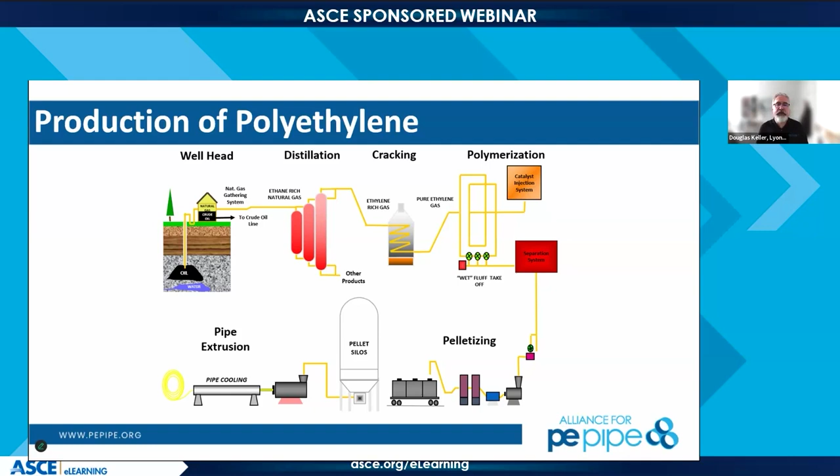We load those materials into a rail car. The majority of polyethylene is shipped to our customers in rail cars. Rail transport is an extremely efficient way to move polymer around the country. When it gets to our customer, they unload, check the material, and make sure that what they received is what we should be sending them, load it into their pellet silos, and then they go through the pipe extrusion step. Now, Alan, if you can go to the next slide.

This is kind of an old schematic of a polyethylene pipe production line, but way on the left, in the upper left corner, you see the extruder. It's somewhat hidden. In that extruder, we have a single screw that is turning. It is using frictional heat to take those pellets, melt them, and form them into a stream of material coming out of the die. That then goes into the vacuum tank where it is sized.

Most polyethylene is sized to the outer diameter of the pipe. So we have a certain fixed outer diameter that we're looking at. And then we can adjust by changing the die setup, how thick the pipe is and what the diameter of the pipe is. It then goes into secondary cooling tanks.

So we're trying to take that heat back out to solidify the material. It is being pulled by the pulling head or the pulling machine once it comes out of the die. We go through wall monitoring to make sure that we're making the diameter and the thickness that we need. And then the pipe is cut in whatever lengths that you need. So we can supply pipe in stick form, which is typically 6-inch diameter and above, or we can also provide it in coil form, which is 6-inch and below, depending on what your application is and what your end use for the material is.

So, Doug, this gets bigger, right? When we get into larger pipe, because we've been talking about larger pipe for a while. I mean, this stuff gets pretty darn big, doesn't it? Yes, it does. So these lines can be 150 to 200 feet long, to give you an idea of how long they are.

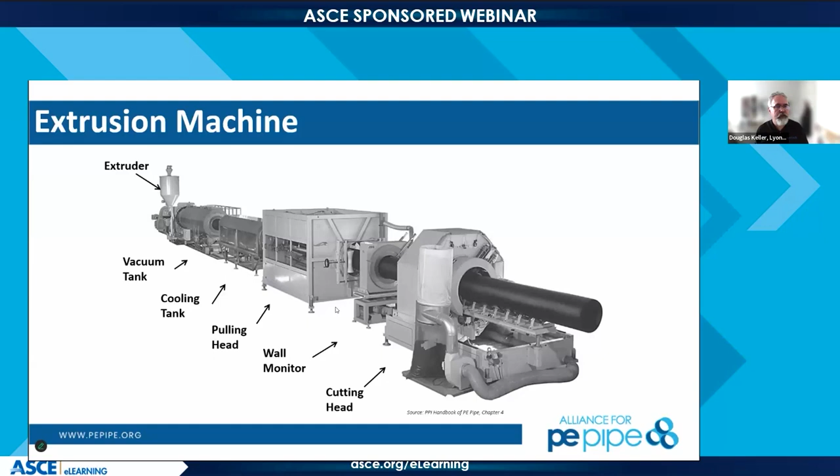All right, next slide. So when we talk about plastics, there are two general categories. Think of this like metals - you have your ferrous metals, your copper metals, your aluminum metals.

In plastics, we have thermoplastic materials, like polyethylene or polypropylene, as you can see from the pipes in the image. A thermoplastic material can be repeatedly softened by heating and then hardened by cooling. This allows us to take those cold pellets, heat them up, make pipe, and send the pipe to you. We then fuse the pipe together by heating it up again, cooling that joint down, and now you have a monolithic piping system.

So it is reversible and repeatable. The polymer maintains all of its physical properties during this melting and cooling phase. There's really no change to the polymer in the number of times you'd typically expect heating and cooling to occur. Typical thermoplastics include polyethylene, PVC, polypropylene, and the polyamides, which includes nylon.

On the other side, we have what's called thermosets. This is a material that, when heated up, undergoes a chemical reaction called the curing process, which turns it from a material that can be heated and reformed to one that can't. So it changes the mechanical and material properties of the polymer - it's irreversible by application of heat.

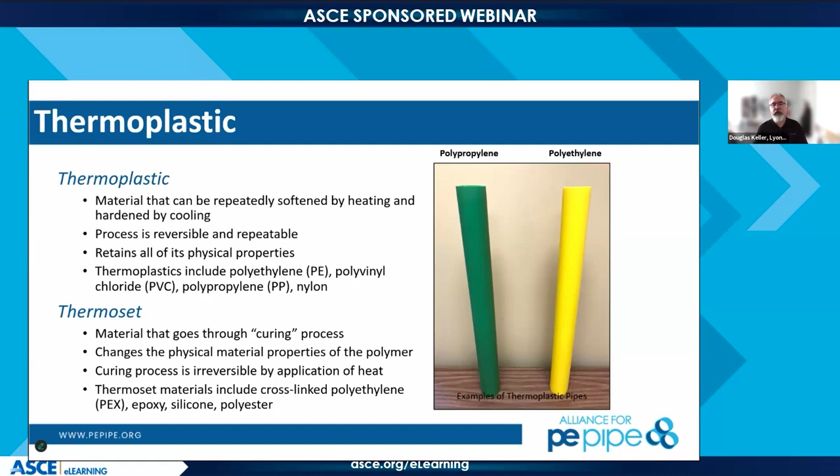In the piping world, this would be something like an epoxy fiberglass reinforced pipe - I'm not going to name the name, but you know who I'm talking about. Those are typically stick pipe with some type of mechanical gasketed joint, because you cannot heat them up and fuse them back together. On the plumbing side, PEX, or cross-linked polyethylene, would be another example of a thermoset material.

Next slide. When we talk about material and fusion, I want to point you to this example on screen. This is multiple thin sheets of polyethylene that have been laminated together and then put through the butt fusion process. So when we talk about material flowing into the joint, you can really see what's happening to the material when it's heated and when pressure is applied to that fusion joint. That material is spreading, and as it spreads, it allows that joint to be formed.

Next slide. This is a video of the fusion process. Here we've heated the material up, we've created a bead. We're removing the heater plate, and now we're bringing the pipe ends back together - you're going to see the fusion bead form. See how that material is flowing up and out, and on the inside it's flowing out and down to form the fusion bead.

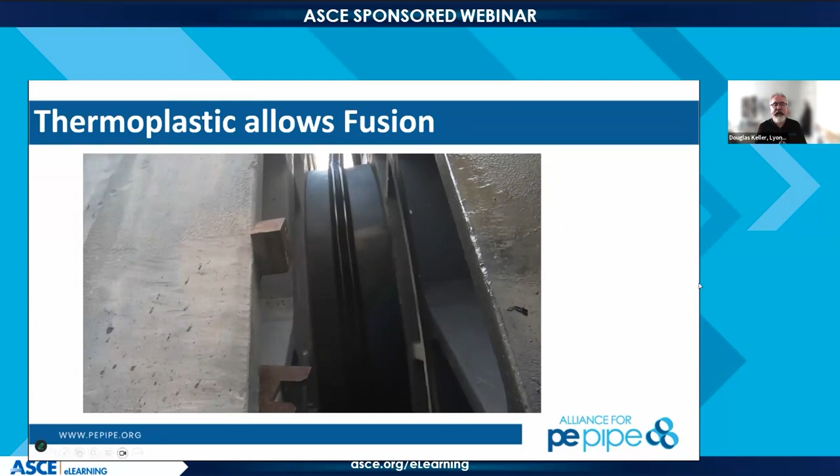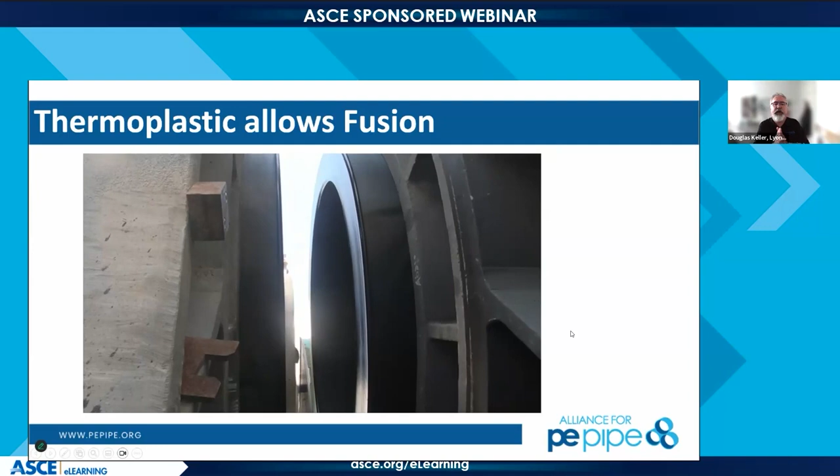So this is what can be done with a thermoplastic material that can't be done with a thermoset material. Now, I don't recommend quickly removing the bead like they did in this video - there's a cooling step and things we have to go through - but it's that thermoplastic property that allows fusion to occur.

So what happens during the heat fusion step? Well, polyethylene is a semi-crystalline material. For high density polyethylene, it's roughly 60% crystallinity, and the crystal section is a regularly ordered crystal structure, very similar to metallics that have a crystal structure to them. In between those crystals, which are tightly packed loops, we have amorphous material.

So what the amorphous phase does is it ties those crystals together, and it has a certain give to it that allows for some of the properties we'll talk about. So when we heat up the material, as we heat it in that fusion zone, the crystal structure is erased and the material becomes very amorphous. There's no general structure to the material.

When we bring those surfaces together and allow it to cool, we have material flowing in the joint. As it flows, those chains basically start to entangle with each other. And as it cools down, we reform that semi-crystalline structure. You can see in the last picture, now we have a semi-crystalline structure that resembles the two single pieces of pipe, but that semi-crystalline structure is across the whole joint.

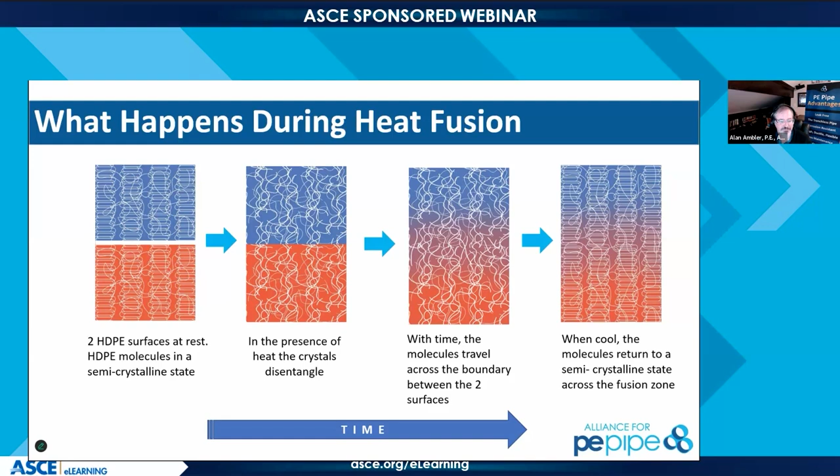I'm sorry to interject. Okay, next slide, please.

All right, so I talked about semicrystalline before. Again, the crystalline regions give the material its density. And density is related to the tensile strength of the material. The more dense the material, the higher the tensile strength, the higher the stiffness, the more chemical resistance you have. If you're a chemical and you want to get through that image on the left, that's a pretty tortuous path.

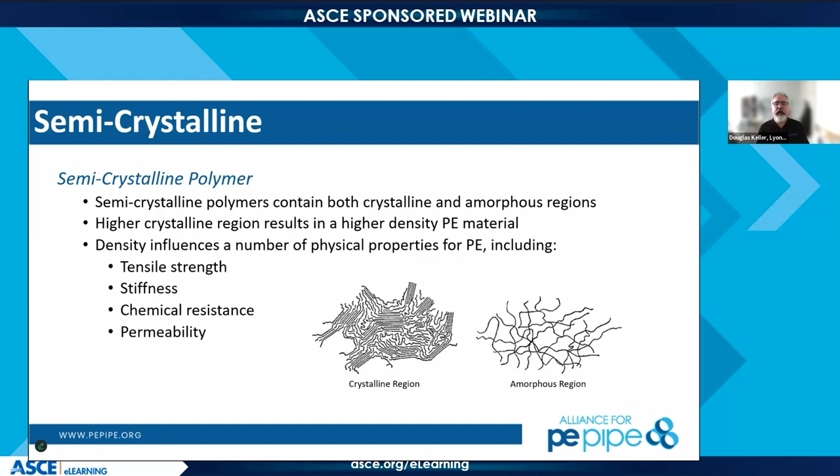That's like driving through New York City. However, on the right, if you're a chemical and it's all amorphous, it's pretty easy to get through. That's like driving through West Texas. So the balance of these two properties is what gives polyethylene a lot of its properties and its advantages over some of the competitive materials like metallics, PVC, and other plastic materials.

So again, think of it as being semi-crystalline and think of it as a benefit. When we have a semi-crystalline material like polyethylene, we have what's called viscoelastic behavior. Depending on the force applied and how long it's applied, the material will respond differently.

So if you take a sledgehammer to a polyethylene pipe, give it a big whack, the sledgehammer is going to bounce back. Hopefully you're not directly in front of it. If, however, we are applying stress over a longer period of time, say in a 10-hour range, where we're doing a horizontal directional drill and pulling on that pipe under tension, its modulus of elasticity, its stiffness, will decrease over time. So it depends on the duration of the load.

Now, I know you're looking at this going, yeah, but I want to design for a 50-year, 100-year service life, Doug, I want 150 years of service life. Does that mean my stiffness has basically gone down to 20% of what it was when that pipe was sitting on the ground waiting to be installed? No. When properly buried, the amount of force from the crown and the arching effect of the soil is about 1 to 2 psi. So if properly installed, this pipe is really seeing no type of backload, even if we're talking about 25, 30 feet of depth of cover.

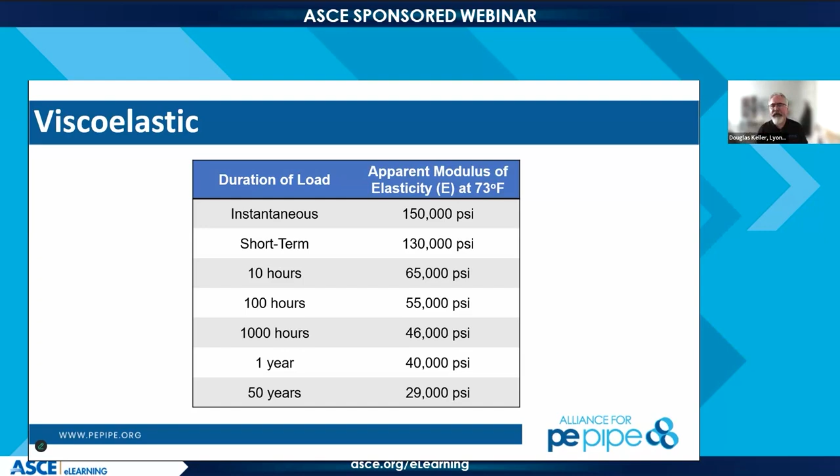Yeah, and the other thing is we'll talk about surge allowance in a little bit, but the benefit of polyethylene is that elasticity that it has. So when we have a surge event come down the pipeline, it's basically going to cause that pipe to expand. The pipe, because of its elastic properties, will stretch a bit like a rubber band and absorb some of that energy from a surge event. So that's why we have significantly better surge resistance than other materials, because of that elasticity inherent in the polyethylene molecule. Next slide, Alan.

So a little bit more on viscoelasticity. We use silly putty as an example. Silly putty is a polymer, a very low molecular weight polymer. If you take a ball of silly putty and sit it on the counter and let it sit, after about 5 minutes it goes from being a ball to being kind of a lump or a patty. And that's creep. So all plastic materials will creep over time.

Now, from a design standpoint, it's not something you need to be concerned about, because again, a properly installed pipe, whether above ground or in ground, is going to be supported so that creep doesn't become an issue. But it is that elasticity, that viscous flow over time that occurs.

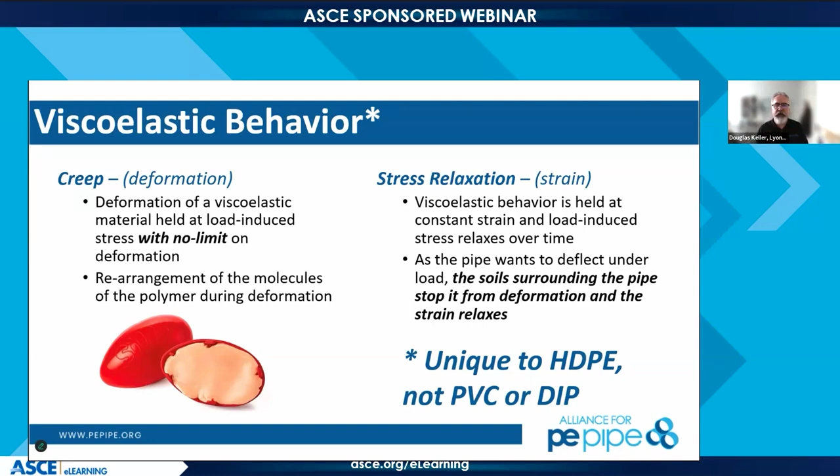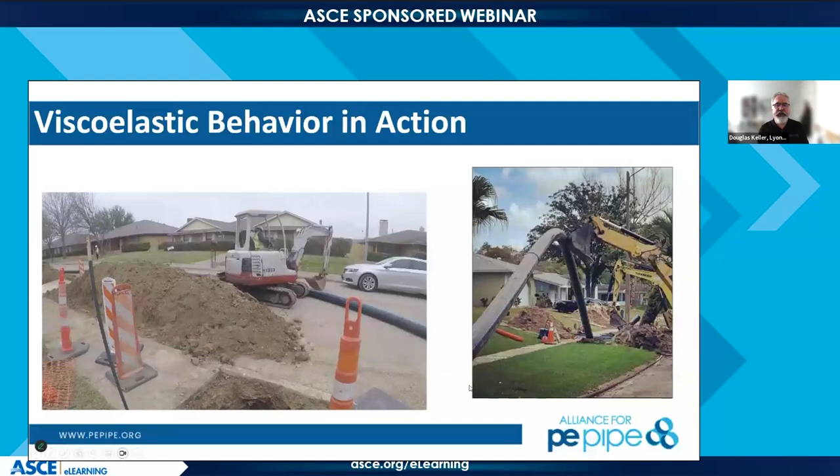The video on the right basically shows that viscoelastic behavior, the ability of the polymer to take short-term loads by being lifted up and then pulled down as part of the entry pit for a horizontal directional drill. So that's the benefit of the material. This is not something you could do with any type of metallic system. You could not do this with a PVC bell and spigot system. So that's that unique benefit of polyethylene in the real world installation.

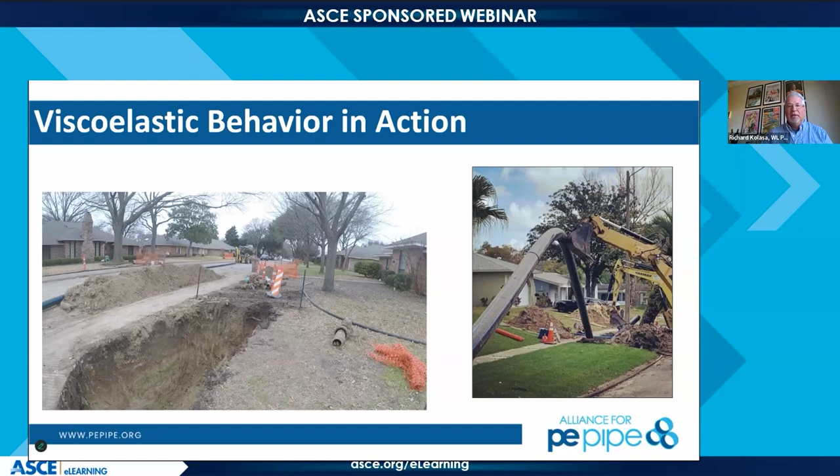When we talk about creep, the first thing that comes to people's mind is deformation. But this pipe is not deforming. Under the conditions where we understand the minimum bend radiuses and those aspects of viscoelastic behavior, you're not affecting the wall or the OD if done properly to specifications. So it's not a deformation aspect, but a temporary situation for installation that helps benefit efficiencies, especially in trenchless technologies.

And if you go past the bend radius, you might kink the pipe. If you kink it, cut it out, fuse it back together, and keep going.

So when we talk about material designation, what do we want to see on the print line? First off, you want a pipe with a print line. Never, ever accept a pipe without a print line, because you don't know what you're getting. It's like the can at the grocery store that's 25 cents because the label fell off—you don't know what you're getting. Is it beans? Is it succotash? You don't know. Got to have a print line.

What the print line will tell you is the material designation and cell classification for the material. We have a classification system in ASTM which gives us this cell classification—PE 445574C, which is a black PE 4710 pipe. However, not being a numbers person, you may just know it as PE 4710. That is the latest, newest material on the market, giving you the highest properties you can find for a polyethylene material. So any print string you see should have a PE 4710.

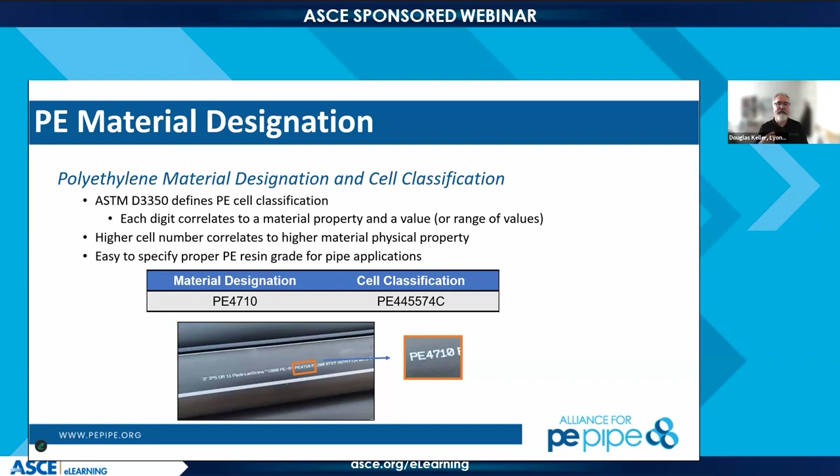And for water applications, it will then be followed by a CC3, which is chlorine categorization—we'll get to that in a couple of slides. But always make sure you read that print line and that you're getting what you expected when you ordered that pipe. It will tell you the pipe size, the pipe thickness, the pressure class, when it was made, and who made it. That print line is traceable all the way back to the material through the pipe manufacturer.

So it's always good—if you have an issue, we need that print line. So what does PE 4710 mean? Well, PE is polyethylene. The first digit refers to the density. As we talked about, density controls our tensile strength and our stiffness. It's also a controlling factor for our pressure class and pressure rating of the material.

The second number is the slow crack growth resistance. This is a test we perform in the laboratory at elevated temperatures. The minimum value for a class 7 is greater than 500 hours. Now most of the material, as we'll see on the next slide, is well above the 500 hours. And then the 10 refers to the hydrostatic design stress of the material.

If you could go back a slide, Alan—that 10 is 1,000 PSI, so that includes our design factor, and that's where we start when we begin our design with PE 4710 materials. We start at 1,000 PSI of tensile stress on the wall, and then we adjust that depending on pipe thickness and the applications it's going into.

Richard, I see you popped on. Yeah, this is really an important aspect, because on the first slide you showed about where polyethylene comes from, there are lots of different reaction methods to make different polyethylene. So this is specific to pipe grade products. And as a pipe manufacturer, we also have to make sure that Doug or whoever is supplying the resin to us is sending us the right product. So we have to check it—it's really our regulation aspect to make sure it's going to perform to the expectation we're going to talk about.

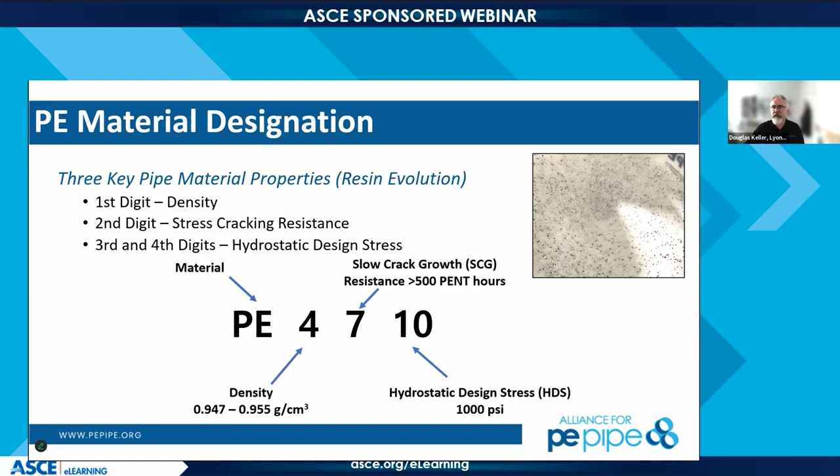So we have built-in UV stability, unlike PVC. In our case, with black pipe, you can leave it out in the yard, install it above ground, and it's fine. It's got UV stability—the same UV stability used in telephone wires, which have been up in the air for 60, 70 years. They work just fine. Just wanted to point that out.

There are different classes of polyethylene. So if you go to the big box store and want to install an irrigation system in your yard, you're probably getting a PE 1404 material. It's a very flexible material. It's not going to see pressure all the time, so it doesn't need as much pressure resistance as a distribution main would need.

Our 2406 products—this is typically what's being used in the gas industry. This is yellow pipe, so it's a more flexible pipe, but it's also operated at significantly lower pressures, on the order of 5 PSI, maybe 50 PSI total.

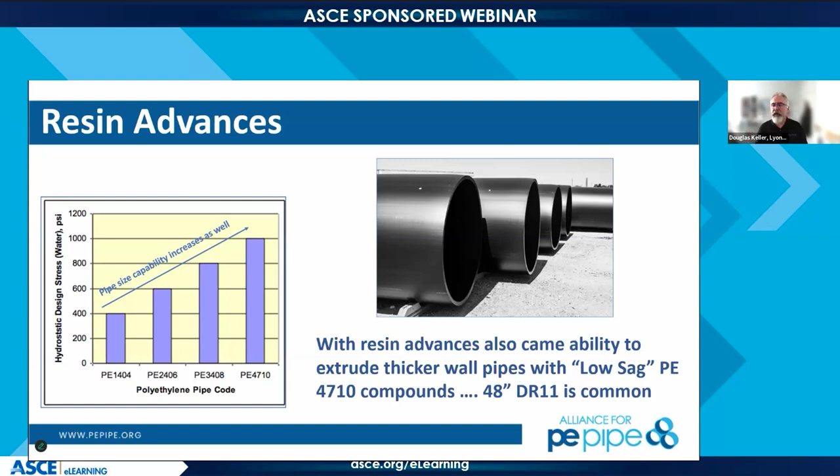3408s were the older high density polyethylenes, and now we're looking at the 4710. So as we have evolved the material, we have increased its ability to handle pressure. And as Alan talked about, we have now developed a new class of materials called low sag materials—all the benefits of PE 4710, but now we can make larger diameter pipe.

So it's a great material, but it does fail. It fails long out in time, and it fails by what's called slow crack growth, or a lack of resistance to slow crack growth. So if the pipe isn't properly installed—let's say it's buried on top of a rock, or we're doing a downhole application for geothermal and the pipe slips and gets pinched against the concrete collar—we are going to induce a stress in the pipe wall. That stress will eventually cause the material to crack.

Now hold on. When we developed the PENT test, a lot of work was done exhuming pipe from the field, and it was determined that 1 hour of PENT resistance is equivalent to roughly 13 years of typical in-field service.

The 4710 resins have to have a minimum of 500 hours of PENT. 500 times 13 is 6,500 years. Most of our PENT values are actually in the 5,000 to 10,000 and above range. Does that mean the pipe will last 130,000 years? I don't know, I won't be around to answer that question. It's probably asymptotic, but what we are confident to say is a 100-year design life is easily handled by these materials, and likely longer.

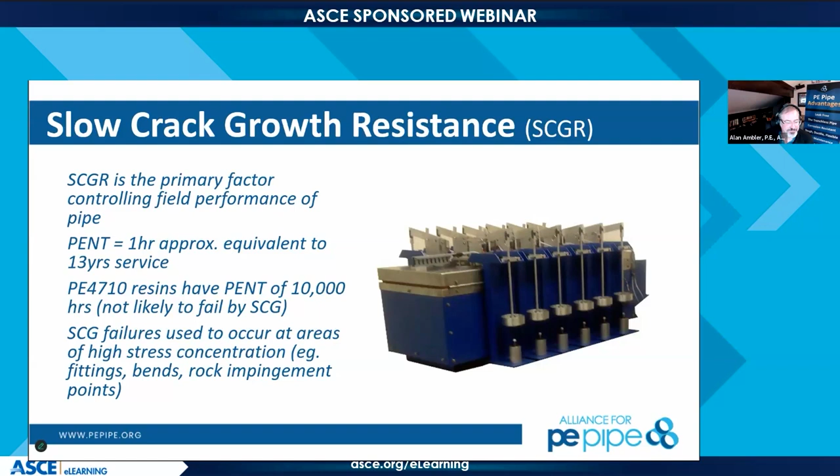All right, chlorine resistance. Polyethylene is affected by chlorine. Chlorine is present in potable water to neutralize viruses and bacteria. What we are concerned about is secondary disinfection. If you are using a system where your secondary disinfectant is chloramine or some type of free chlorine, be it chlorine gas, sodium hypochlorite, hypochlorous acid, whatever it might be, polyethylene, we know how to design for that. If that secondary disinfection is using chlorine dioxide, you really need to talk to your pipe manufacturer and understand.

For the EPA, for free chlorine, the limit is between 0.2 ppm and 4 ppm. Chlorine levels dissipate as they work through the distribution system. So 4 would be at the distribution plant, 0.2 would be at the end of the line. That way we have enough chlorine to disinfect the pipe.

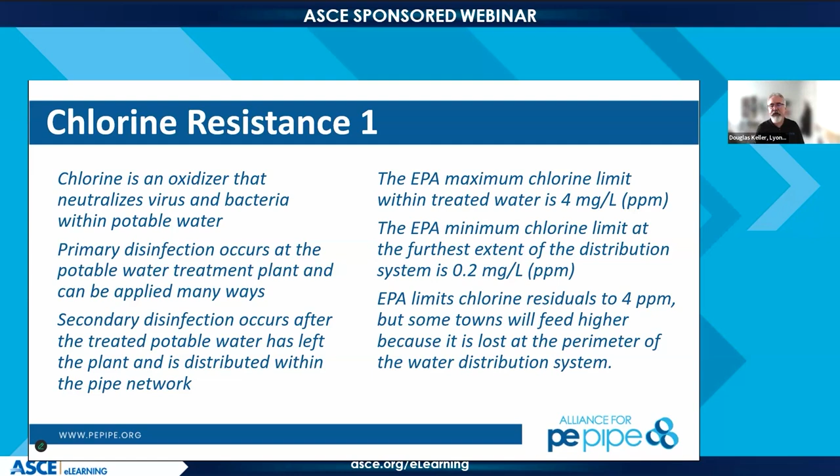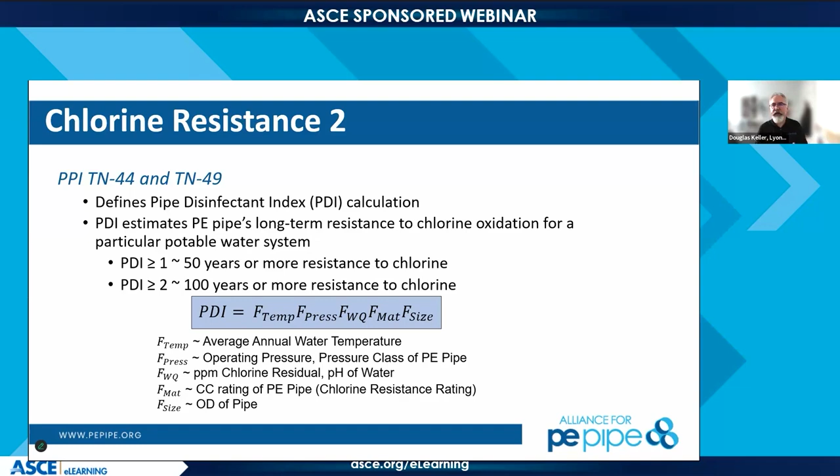We have done a lot of work on chlorine. The earlier generation materials, with 1 hour, 3 hour, or 10 hours of PENT, were more susceptible to chlorine resistance failures. We did a lot of work as the Plastics Pipe Institute looking at small diameter and large diameter pipe in order to design and understand what happens with chlorine. So in most cases, and we'll see this on the next slide, chlorine is not going to be an issue in the distribution system.

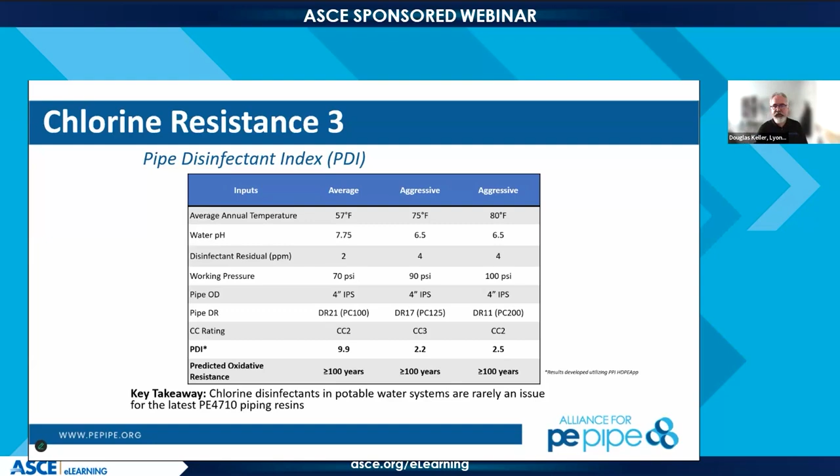As we see here, on average, even a CC2 material, which is not allowed in water piping, CC3 being the minimum resistance required by AWWA, in a typical average water system you're going to get greater than 100 years of design life based on chlorine resistance. If we talk about aggressive systems, these would typically be the Southwest United States, where we have shallow burial of the pipe and hot soil temperatures, typically using a surface water system where more disinfection is needed. We are still looking at greater than 100 years of service life, design life, with a CC2 material, and even more with a CC3 material.

So this is all based on exhumed materials. We have a very good idea of what the design is.

Where can I operate polyethylene? Well, polyethylene doesn't become brittle until -130 Fahrenheit. So pretty much anywhere on the planet you can operate polyethylene, and you can pick it up and bend it, and that material is not going to break.

Unlike some other plastic materials, an amorphous polymer is actually in its brittle state at room temperature. An amorphous material would be a PVC material. That's why you can put a hammer to polyethylene, but you don't want to put a hammer to PVC.

So the question comes up: at what temperature can we actually perform butt fusion and join these pieces of pipe together? We can do that down to -40 degrees Fahrenheit. Typically if we're below 32 degrees, we'll mitigate the cold, whether working within a structure, mitigating wind, or adding heat into a tent. But we can continue to fuse into some cold weather. Generally, if your people are comfortable, you're going to be able to fuse from a temperature standpoint.

They are predicting snow in Florida, in northern Florida, and basically everything is shut down. If it's -40, people are generally going to be uncomfortable to begin with, let alone the pipe. But it's good to know that if something like that happens, you put a heater up and you're ready to go in Wyoming or otherwise.

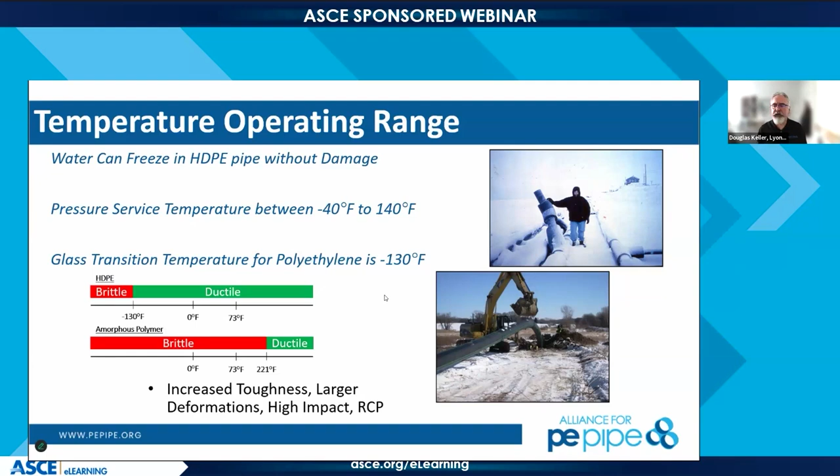Richard, I'm going to hand the baton over to you, sir. All right, thank you very much.

Of course, one of our greatest prides is the leak-free system that we're providing. We don't like leaks. We don't accept leaks, and we don't think that leaking is a good idea.

So how does this happen? If you start doing a comparison between metallic pipes and polyethylene pipes, there's corrosion. The corrosion aspects of polyethylene do not exist, unless there's some type of chemical attacking the polymer, which isn't really corrosion, but more of a chemical attack. But you can see that legacy pipes do have corrosion issues. They also have tuberculation issues.

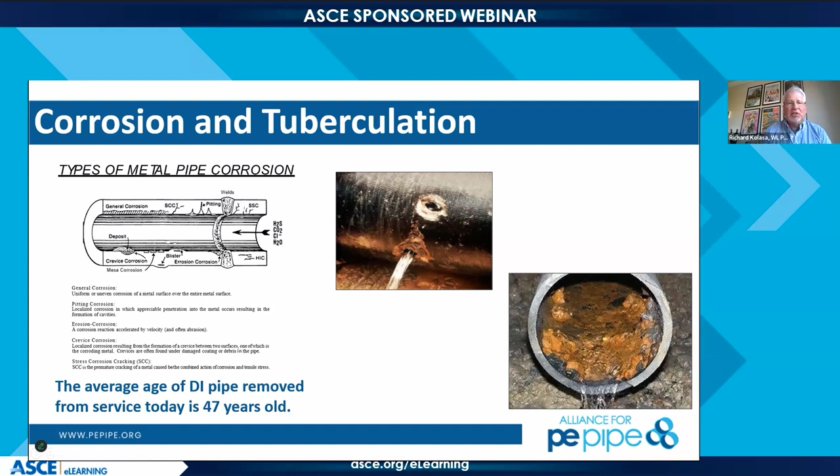Polyethylene doesn't support biological growth, and things don't really attach to it. It's almost like a Teflon type polymer where things don't stick. You may have buildup of greases in a sewer system, but they can be easily removed because jetting will not affect the pipe at all. We did experiments up to 5,000 psi, held it in one spot, and tried to damage the pipe, but it resisted - the water just bounces off of it.

So there's a real benefit from the sewer aspect that we don't have to worry about. The tuberculation aspect also affects your flow velocities and restrictions, and that corrosion can support biological growth like we saw in Michigan. These aspects of tuberculation are not good for pipeline systems - they affect pumping ability, water quality, and disinfectant efficiencies. We don't have to ever worry about that.

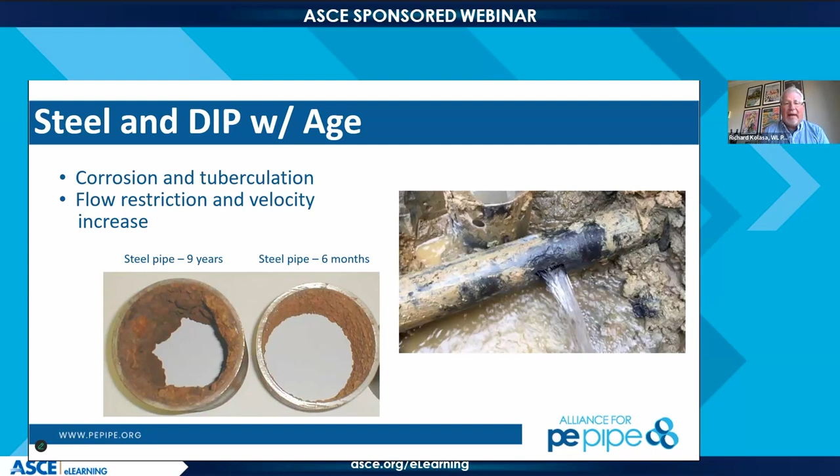Now, it's not indestructible. I've had several inspectors call me and say, hey, I've got scratches on the pipe. This has happened, and we have ways to evaluate it. We encourage good installation practices or best practices, and those are available in the engineering manual and also in several PPI documents.

When in doubt, cut it out is one of the phrases we use at the Alliance for PE pipe. It's pretty simple to cut that joint or problem area out, and then you simply fuse it back up. It's that simple.

The flexibility of this pipe really minimizes the number of fittings that we need to add to the system. Unless a change in direction is made in a very short span, we can typically work with no more than a 45-degree bend. We might do some 22s once in a while. We don't need to do 11s. The pipe will move - it'll handle those changes in terrain, whether vertical, lateral, or horizontal.

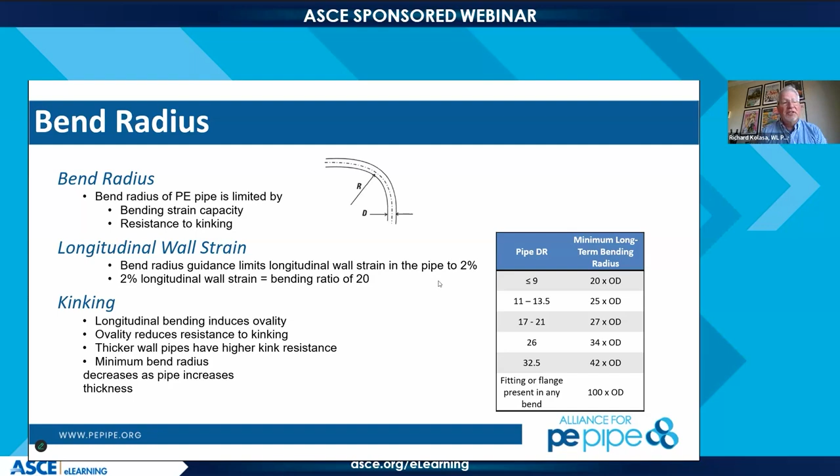Excellent, and that's a cost efficiency and time of installation thing. So your bend radius, we understand the minimum bend radius is really based on DR. The thicker the wall, the more resistance you're going to have to bending, but as you get thinner in wall, you can kink.

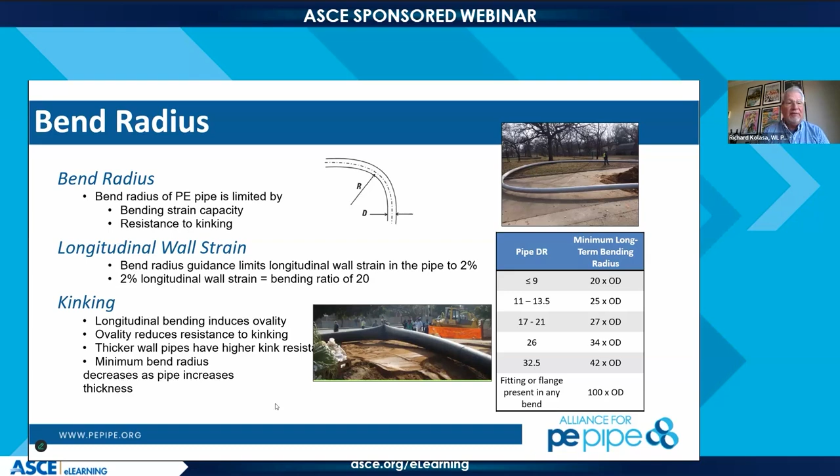You can see in the picture below, there was a large diameter pipe that kinked because they exceeded that bend radius. But you can cut that out, that's not a big panic unless all the fusion equipment is already gone. You can cut that out, re-fuse it, and then continue on. You don't have to panic about whether or not it's an outstanding issue, but that information is available.

Establishing your pressure rating, there's really two important factors. We evaluate polyethylenes at 73 degrees, or 23 degrees Celsius, ambient temperature. But as we warm the pipe, being a thermoplastic, it'll absorb that heat and we can soften it. So if you have an application that needs testing at a higher temperature, you just derate that product based on temperature compensating factors, which we have per degree Fahrenheit.

Also, in association with that is your DR, or wall thickness. The thicker in wall we go, the more pressure resistance we have for that product. So this is the formula, plus environmental effects, which is not shown here. The AF is the environmental effects.

In a lot of aspects where we supply gas industry pipe, if carbon or hydrocarbon contents get over 2%, we have to derate it because there's a permeation effect. It doesn't destroy the polymer, it's just that hydrocarbon gets between the amorphous regions, and we consider that an effect on the entanglement of that polymer. So we have to derate it a little bit. You may have to go to either a thicker pipe or a lower DR, or just derate your pressure to accommodate that environmental effect.

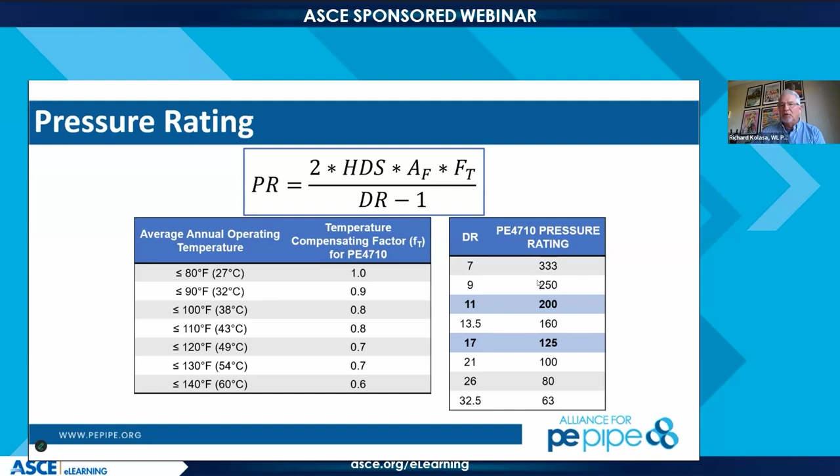That's correct, Alan. And one aspect of understanding this formula is important, I know there was a question on hydrotesting the product. If you hydrotest above ground, you need to take into consideration if that pipe got really hot. Let's say you were on a typical warm day in Florida and that pipe was sitting out all day, and it got warm and the fluid inside also got warm. You can still hydrotest it to 1.5 times if that's the number you're testing at, but you just have to derate it in accordance to the temperature of that fluid and the condition of the pipe. You're still testing at that 1.5 times, but it just needs to be derated.

And of course, with surge, high density polyethylene pipe has a high resistance to fatigue failure, so we need to understand what these surge effects are. We don't really typically fail in fatigue, so pressure up, pressure down, pressure up, pressure down, such as a surge effect. But we have, at a working pressure, which is typically referred to as a reoccurring pressure, 2 times the pressure rating of that product, whatever that DR is.

So in a 333 DR7, that would be 666. And that was for occasional surge, I apologize. For a reoccurring surge, it's 1.5 times, so we derate that a little bit. If your cyclic cycles are somewhere on average of 55 cycles a day in a water system utility, and that's a typical average for the U.S., then we would look at it as 1.5 times the pressure rating to resist for the lifetime of that pipe.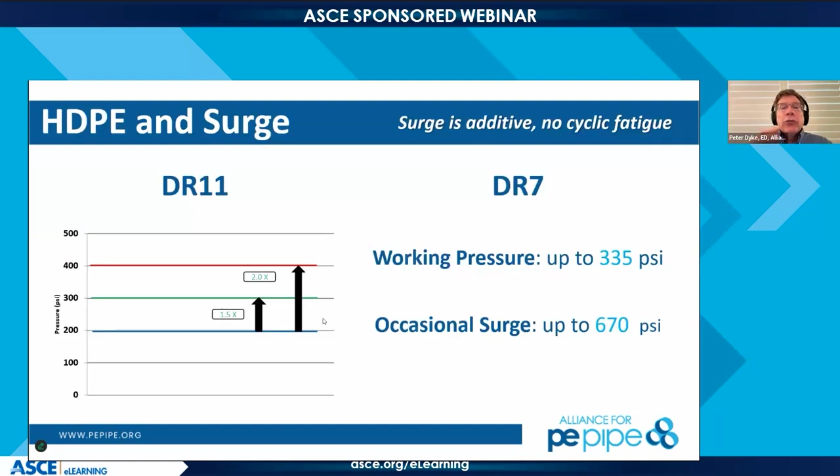Richard, I got a question for you. Sure, we've received over 70 questions from the audience, I encourage you all to keep asking. We're keeping up because we have a good solid bench today. One question had to do with intakes and outflows and rapid temperature changes of water coming out of Lake Michigan, coming out of Holland, which uses polyethylene to heat their sidewalks so they don't have to shovel snow. Their question relates to what resource should I go to learn how to restrain polyethylene with rapid water temperature effects?

Yeah, one of the things you can look at is the PPI PE handbook, which has restraining aspects for those changes in temperature. We also have the S5 calculator on the PPI website, where you can plug in your environmental or operating conditions to look at the stresses applied from temperature change. You can also look at AWWA, which I think references back to the PPI calculator as well. There's also the PACE calculator, which can look comparably at surge events and temperature effects, letting you compare different products for those applications. So there are several resources. I won't go into specifics here, but if you need to, you can contact me offline and we can work through your specific example. You can also contact the Alliance for PE Pipe — we have calculators and spreadsheets set up for that as well.

So we need to keep going, Richard. Let's keep trucking. Yeah, so on the last slide we looked at magnitudes and different aspects. Just go back one quickly — sorry, Alan. Looking at the surge magnitude, the allowance, and the fatigue resistance is really important. So what we're saying here is we understand this phenomenon.

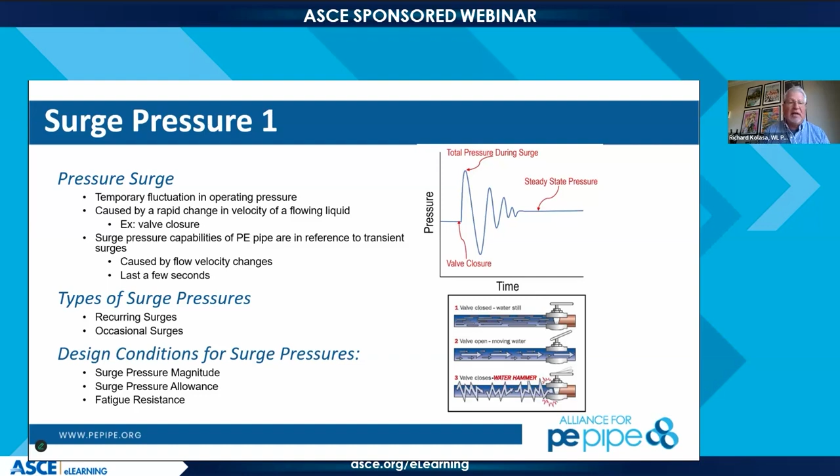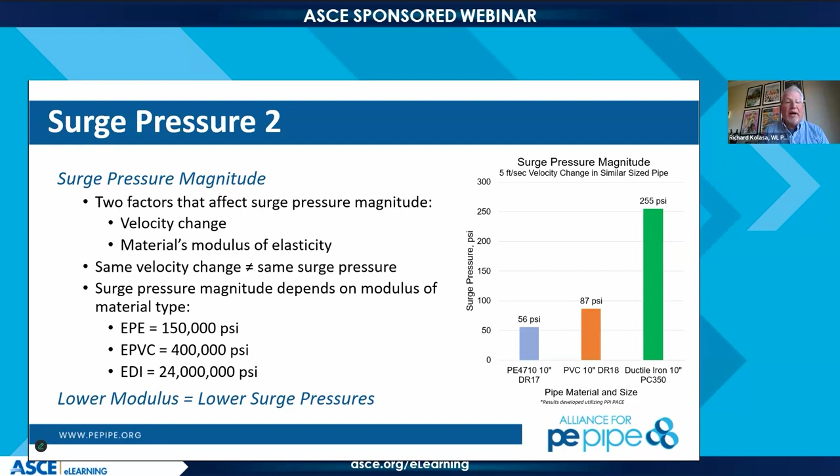So, Richard, while we're here talking about this, most municipalities operate in the 55 to 75 psi range. And when we look at DR11, what is the pressure class of DR11?

200. And then what is the occasional surge pressure class of DR11? It would be 400. So 400 psi when we're looking at something that operates between 55 and 75 psi.

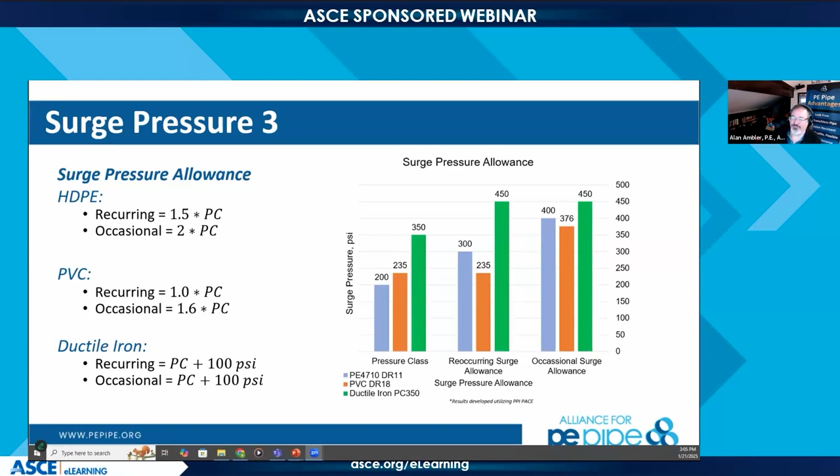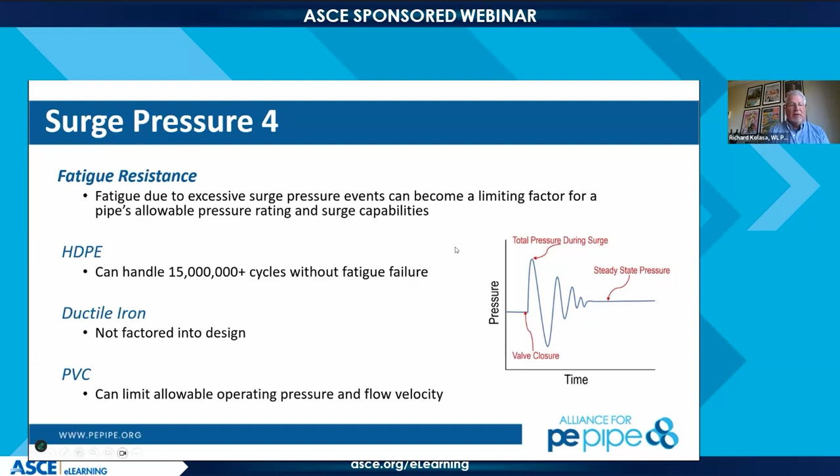Ductile iron, of course, is not factored into the design. We don't really test for, or they don't test for, these fatigue events, but they minimize their velocities to control that surge event from causing failure. So that limits your ability to pump. Now I don't know if that's a factor in terms of the design of what your capabilities are for pumping, but it's just not factored into that design. And again, for an amorphous material like PVC, it's limited to the operating pressure. Looking at the flow designs, we don't really have any issues.

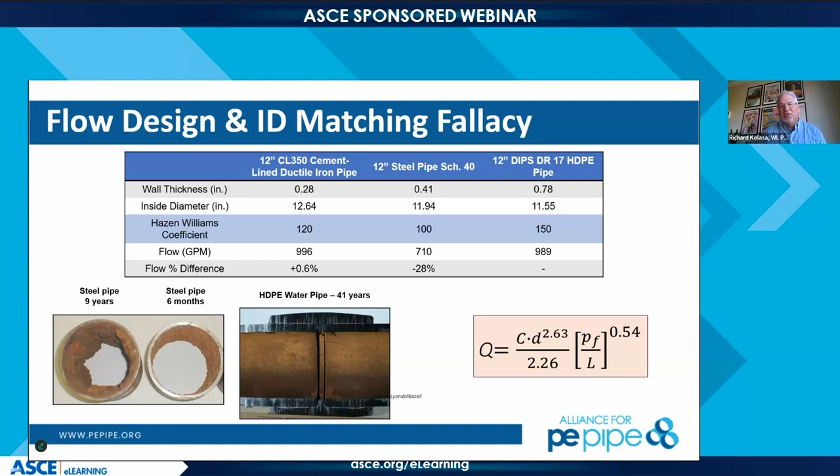There are all kinds of calculations we have to do to compare flow rates and everything to match these types of things. Let's say if you did a drill underneath a highway and reduced the ID of the high density pipe to match the ID of the existing legacy product out there, all you're going to do is gain velocity in that section, which we're not concerned about. So if you went from 5 to 7 or 8 feet per second, then as soon as it hits that open area on the other side, it's just going to slow right back down, but the volume will still remain the same.

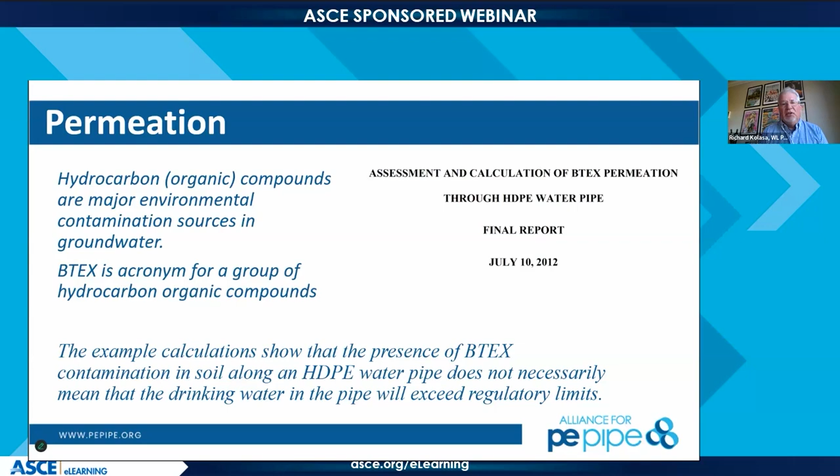Permeation is a great question, a very common one, where BTEX materials, the hydrocarbons and aromatics in the world, do permeate the pipe. We have a calculator you can look at, and I'll be dealing with that in another meeting tomorrow. We went through the calculations of a plume that was in the ground, and it was very, very low, below 0.006 parts per billion after exposure for a certain amount of time. This is a calculator that Purdue University developed to understand that permeability. If it's greater than 2%, then you have to look at your pressure rating as well.

Yes, Peter, I just want to ask Doug Keller to come on. We just got a question from a professor at Tufts about fires in polyethylene and PVC. Doug, I think we can answer both questions intelligently because we spent a lot of time studying this. Given what's been going on in Southern California, it's appropriate to talk about the depths these fires get to and the impact on our infrastructure. Specifically, after you give us a brief review on that, I'm interested in the impact of benzenes and other chemicals that result from these fires on HDPE.

When you have a forest fire or wildfire like we've had in California, most of the material being burned is plant matter, which is known to be a significant source of benzene. So when it combusts, benzene is released into the air. In some earlier wildfires, Santa Rosa in particular, some houses on top of the hill burned, firefighters were pulling water, and they basically pulled a vacuum on those house connections, drawing combustion gas into the pipelines. When that gets in, that benzene will permeate polyethylene, as we've talked about. So it is something that has to be considered.

The U.S. Forest Service has done a lot of work looking at the temperatures the ground sees and the depth that temperature will penetrate in a wildfire. In typical wildfire conditions, after about 2 to 3 centimeters, 1 to 2 inches down into the ground, there's very little change in temperature. So a polyethylene pipeline that's properly buried with sufficient cover for that part of the country is not going to see significant temperatures. Now at the end of it, where it may be exposed, like at a house connection, yes, you could see it.

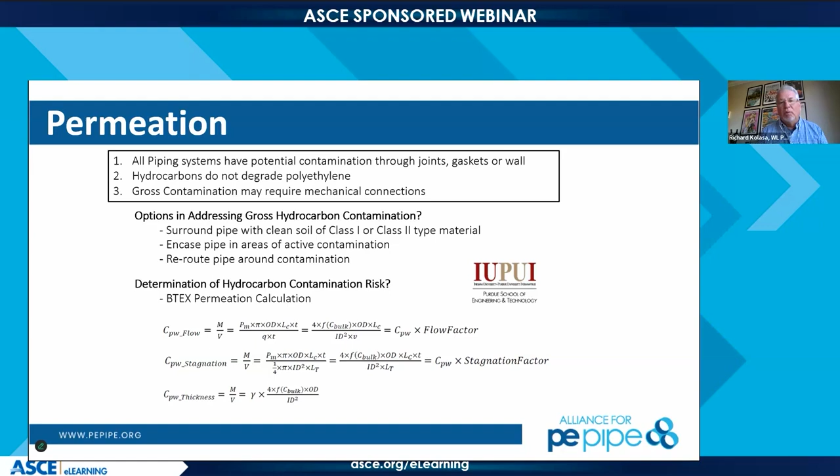So these are the calculations that were used to understand. There's a lot of inputs required for the contamination. If you had a gas station plume in your city and wanted to look through it, we could calculate what that looks like in terms of absorption into the water system and a moving water system. So we can take stagnant water or flowable water, and you get different values for that. But this is what it is.

Poisson's effect is always a big concern during installation with polyethylene, because a lot of the times, like you saw in earlier pictures, the pipe sits above ground and absorbs heat. We put it in the ground, it relaxes, we connect the lines, bury it, and then fire up the line. Then we get this expansion of the polyethylene because we're applying hydrostatic stress to it, or the pressure.

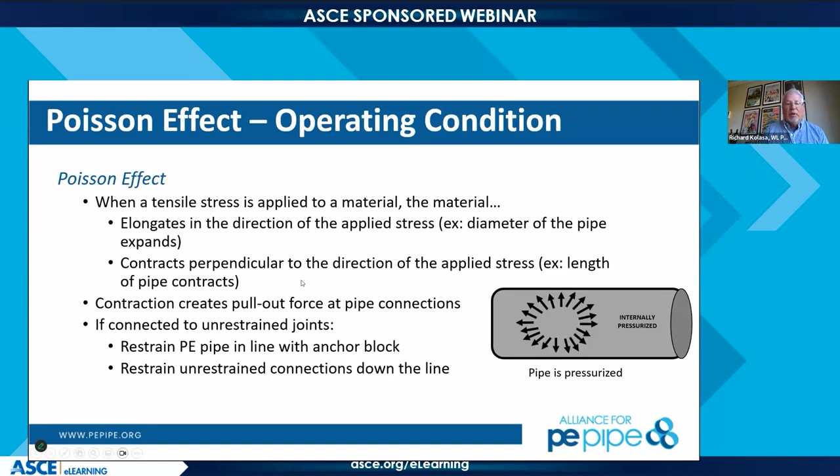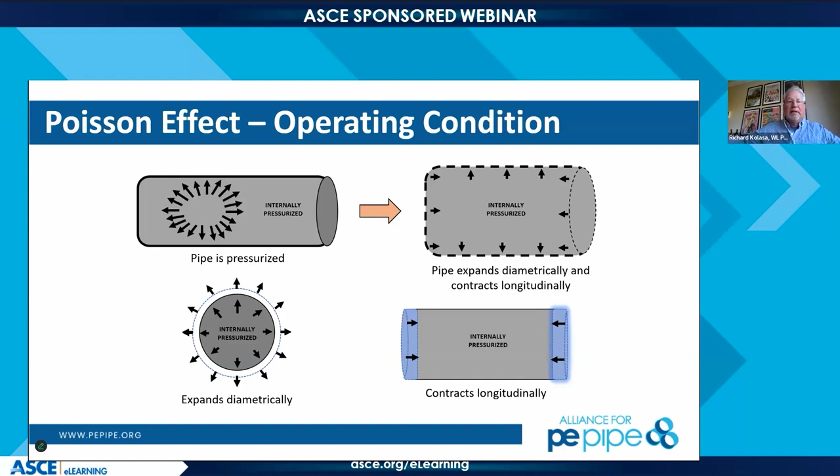So it actually takes the forces and pushes it out, and it has a tendency to pull back on itself, making that line a little bit shorter. So we have to make sure, if we're connecting to legacy products, this event is accommodated for, which we can calculate for, then determine whether we need to protect the bell and spigot we're attaching to. A typical example is we use high density in difficult applications to drill underneath roads so we can connect up to legacy products, and we have to make sure we're protecting those legacy products against this Poisson's effect of expansion from the internal pressure applied to the pipe.

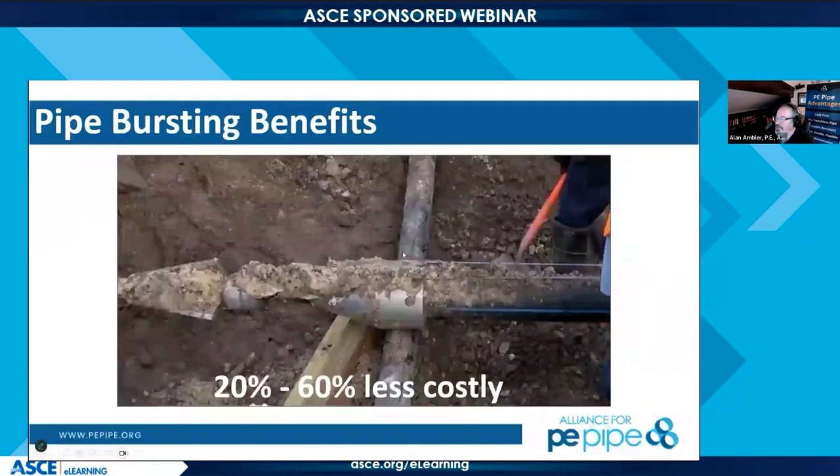Richard, stay on, we only have about 1 minute and 30 seconds. Doug and Peter, come on too. They love to talk about your projects. We absolutely love to talk about polyethylene being installed. Dave is one of those persons as well with us to talk about polyethylene. Taylor, if he'll come back on as well - he's making polyethylene while we're talking now, so I'm not exactly certain if he's going to come back on or not. But making polyethylene is just as important as talking about polyethylene. But here we are.

Mosier, any closing comments please? Yeah, we're about to get to some things about quality assurance on the job site, so I'm more than happy to discuss that with anybody, how we can build quality assurance into your specification and installation. Awesome. Taylor Holiday.